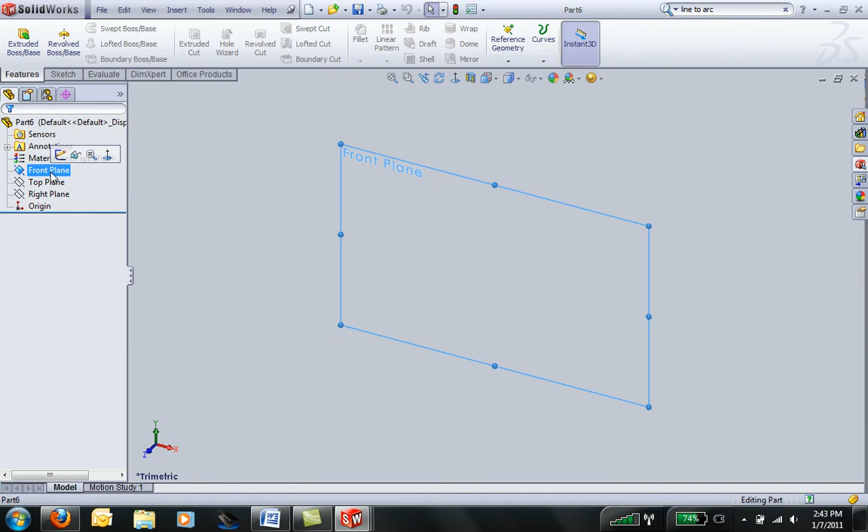There's really two options here. This face has a lot of information on it, right? You can see that the part is jogged, as does this face where you can see the two holes and the slot in the part.

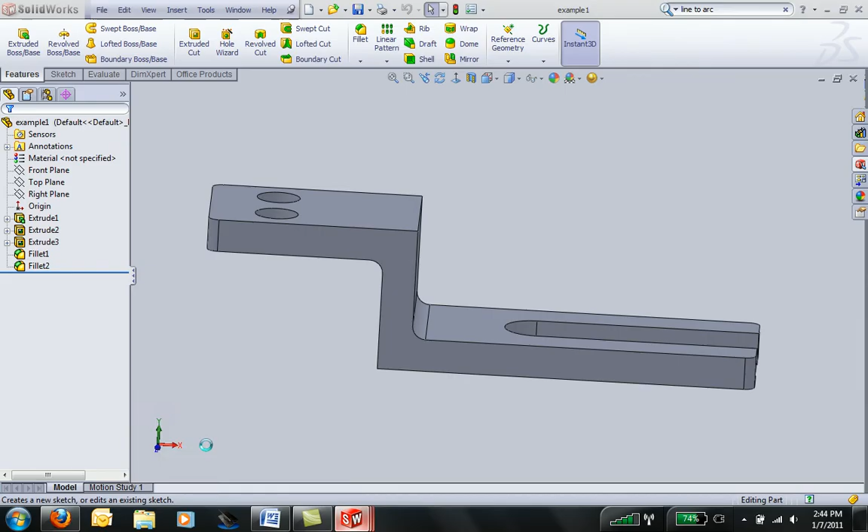I'm going to go ahead and choose to draw this side first, and then I'll add the holes and slot later. So if I go look at the drawing, I can get my dimensions from there. Looks like the whole part overall is 264.2, and the jog is at 180, and the part is 15.8 millimeters thick.

So if I come back to Solidworks, I can go ahead and start my new part. I've got a sketch open, so I'll just grab the line tool. And I remember you want to start on the origin always, and as I come across, notice that there is an angle and numeric value right next to my pointer.

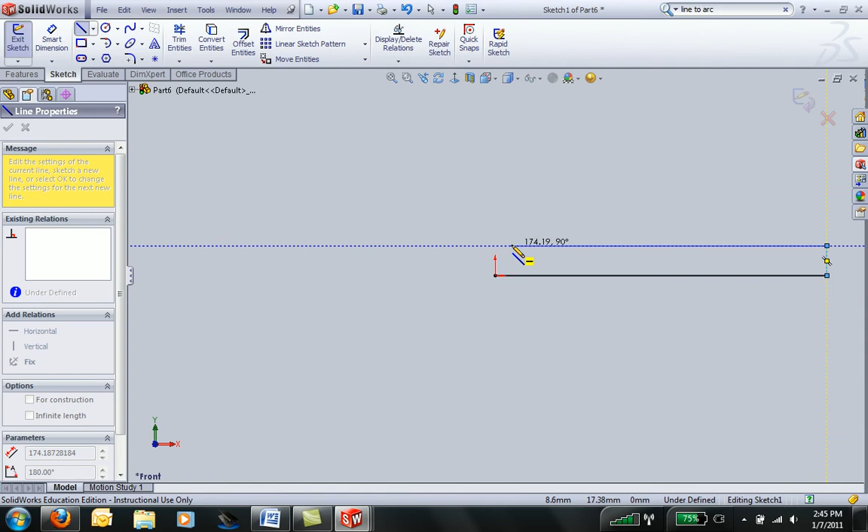So I'm going to come out to about 180, doesn't need to be exact, right? So we can come up to 182, go up till it's about 15, come back across and up about 50, and then out, let's see, I'd need to go 80 more, approximately down 15 or so, back across.

And notice the guides that pop up. So when I come to be vertical from the origin, there's a little dashed line that appears. And so I'll click right on that dashed line to make sure that my lines end up in the right spot. Okay, now I can go ahead and add some dimensions.

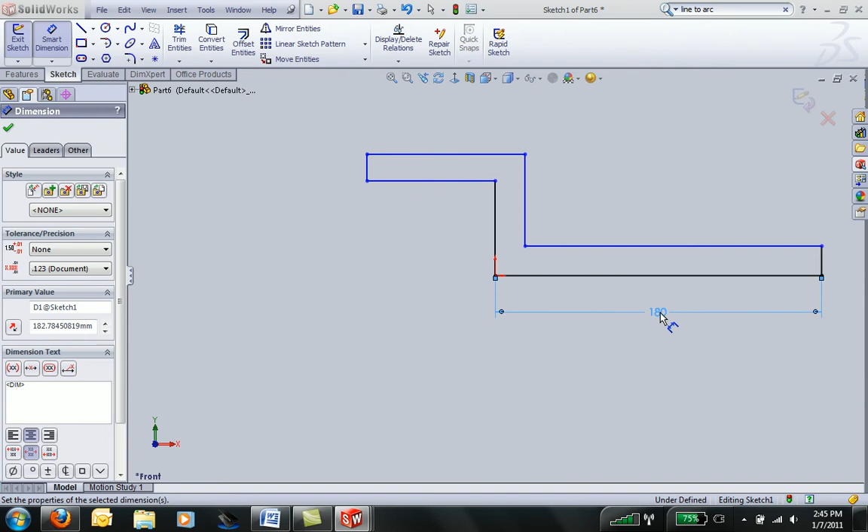I know that this dimension here was 180 millimeters, and that the overall dimension was 264.2. Okay, and I know that the part is 15.8 millimeters thick, so I can add a couple more dimensions here.

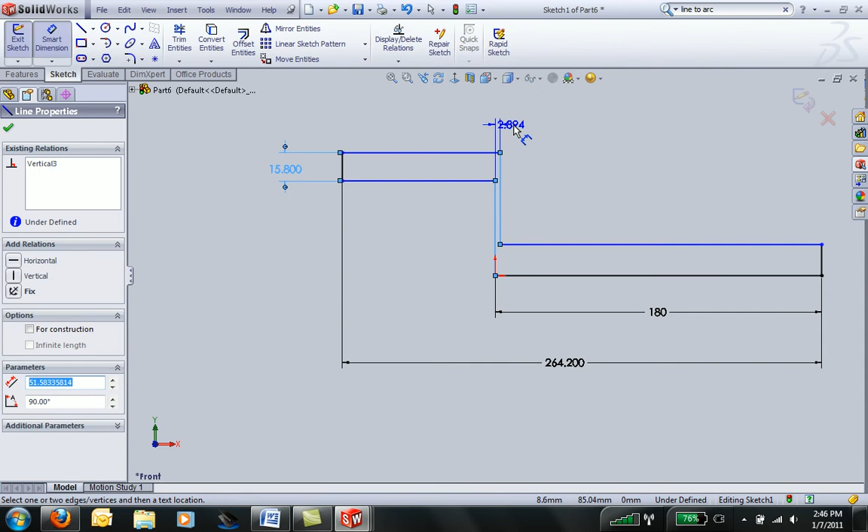All right, so the part's looking pretty good, but you can still see you have some undefined edges here, and if you can't tell what's undefined about them, you can always grab them and try and move them, and you can figure out that you need to add a dimension for height here.

So let's flip back over to the drawing and see how tall the part is. It looks like the part is 70 millimeters tall, so I'll go ahead and add that in. Add smart dimension, click on this edge, and come out to 70 millimeters.

And you want to be careful where you place your dimensions, because in the future we're going to be able to import those dimensions automatically to a drawing. And so make sure you place your dimensions someplace where they make sense.

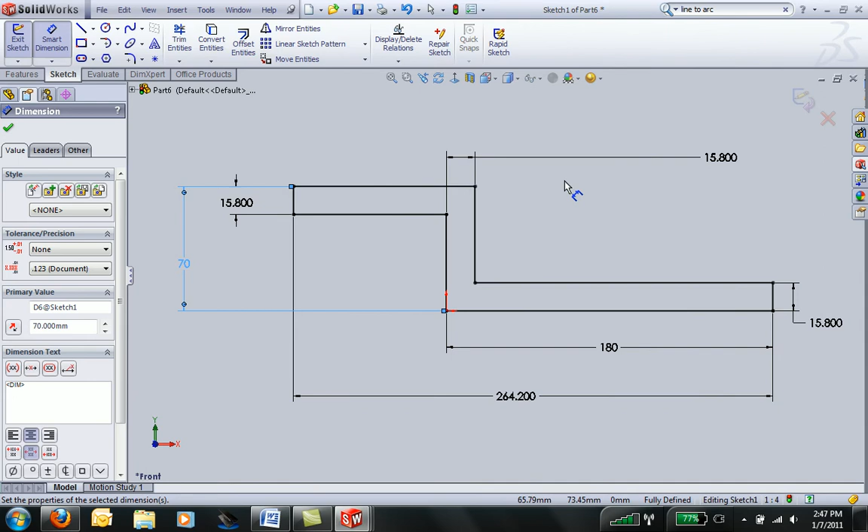All right, when I'm done with the sketch, I can click on Exit Sketch, come over to Features, and extrude the feature. And I can't remember how wide it is, so I'll go back and check the drawing. Looks like it is 70 millimeters wide.

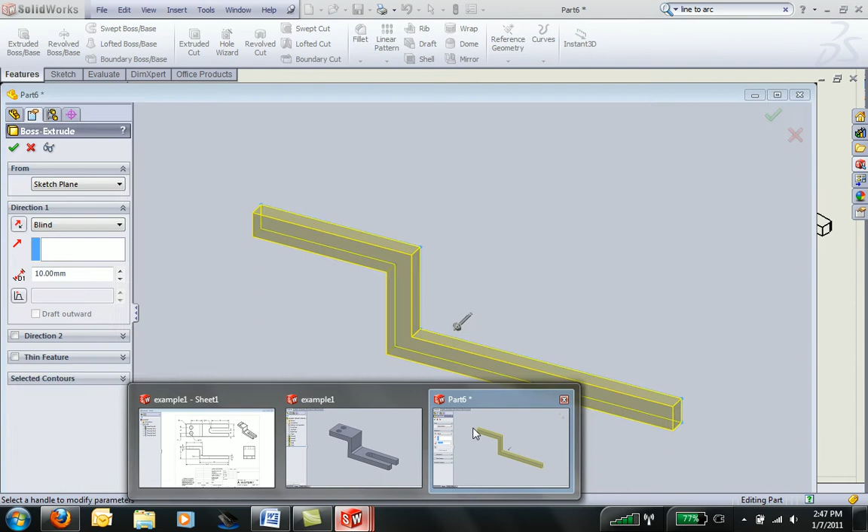All right, so the other thing I'm going to look at while I'm here is that the two holes are located 68 millimeters from the jog, and they have a diameter of 20.6 millimeters and are separated by 32 millimeters. All right, so I'll head back over to finish this extrusion up. Looks like it was 70 millimeters wide.

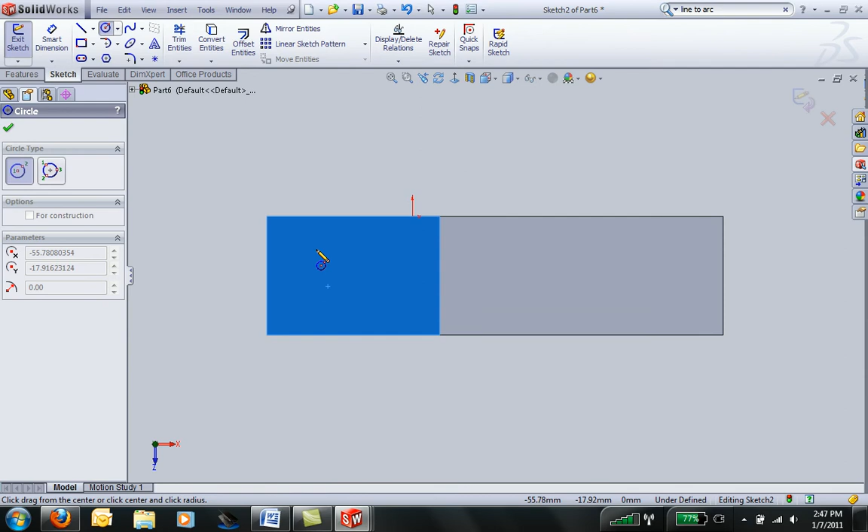Okay, now I need to open a new sketch on this plane to add my holes, so I can highlight the face and then click on Sketch on the flyout menu. I like to use the perpendicular tool, so I can see what I'm drawing here. And I'll grab my circle tool, draw one circle. It's about the right size, and then I can come down and I get a little pop-up to help me to get the two circles vertical.

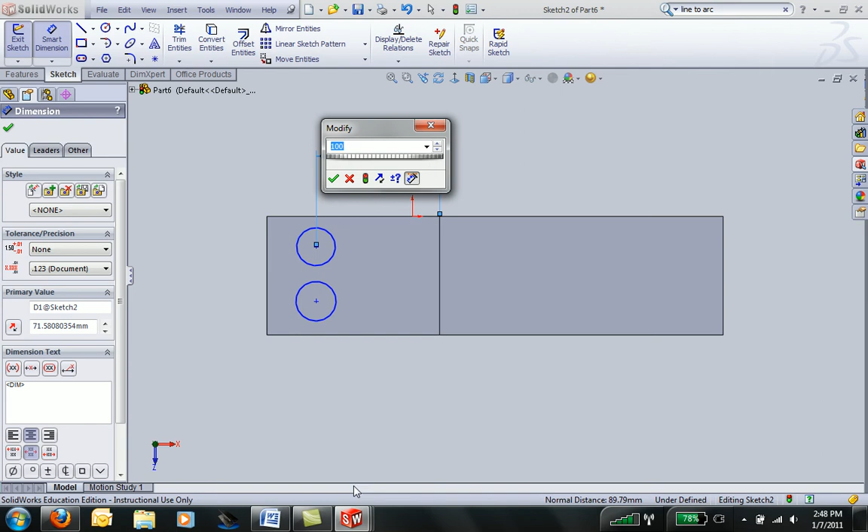I can add some dimensions here, so from the center of the circle to the edge was, well, wasn't 100. I can't remember what it was. So let me flop back to the drawing and I'll take a look. Well, it looks like it wants me to put that in there. It obviously wasn't 100. Looks like it is 68, 32, and 20.6. So I can come back.

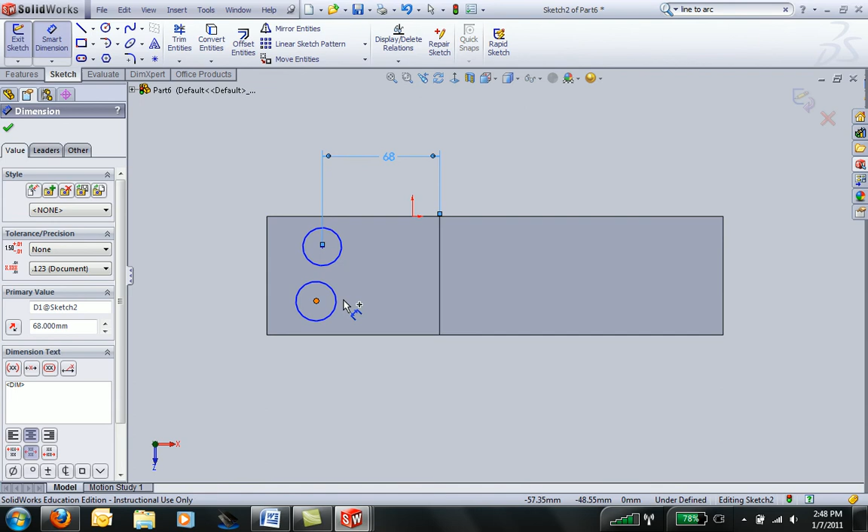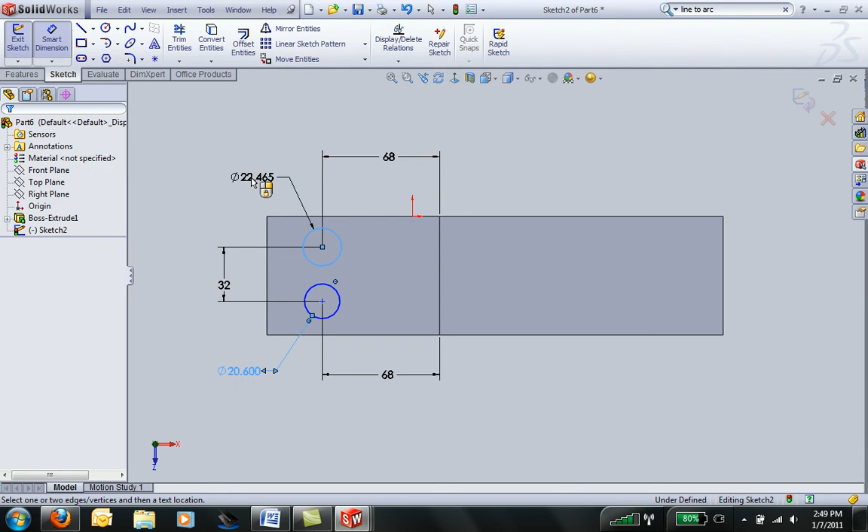If I want to modify a dimension after I've put it in, I can double click on it and say 68. I'll add that dimension for this circle as well. I'll add the separation between them, 32. And I'll add the dimension 20.6 and 20.6.

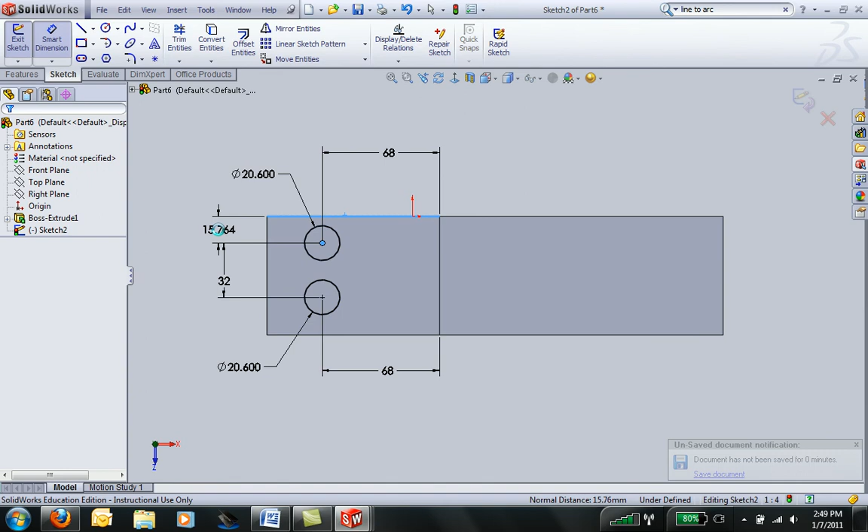And they're still under defined, which if I want to see how they're undefined, I can grab them and see that they can move up and down. And so I need to add that dimension. And it looks like they're 19 millimeters off the edge. So I can go ahead and add that. Okay, and we're fully defined, so I can go ahead and cut those holes right on through the part.

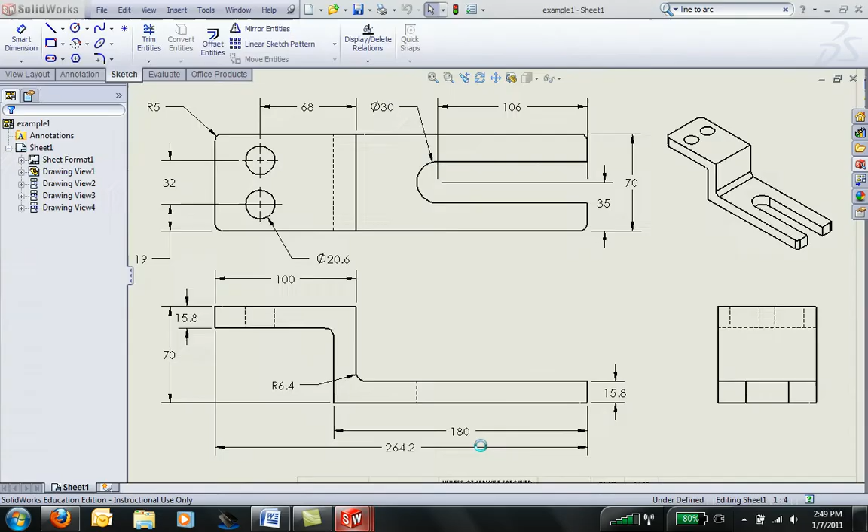Okay, now I need to add my slot, so let's go take a look at the dimensions for the slot. It looks like the slot is 35 millimeters at the beginning and 30 millimeters wide. So it's centered and 30 millimeters wide by 106 long. So I can open a new sketch on here. Again, remember I like my perpendicular tool. And I'm going to go ahead and start this by using my rectangle tool. And then I'm going to need to put a circle on the end of it.

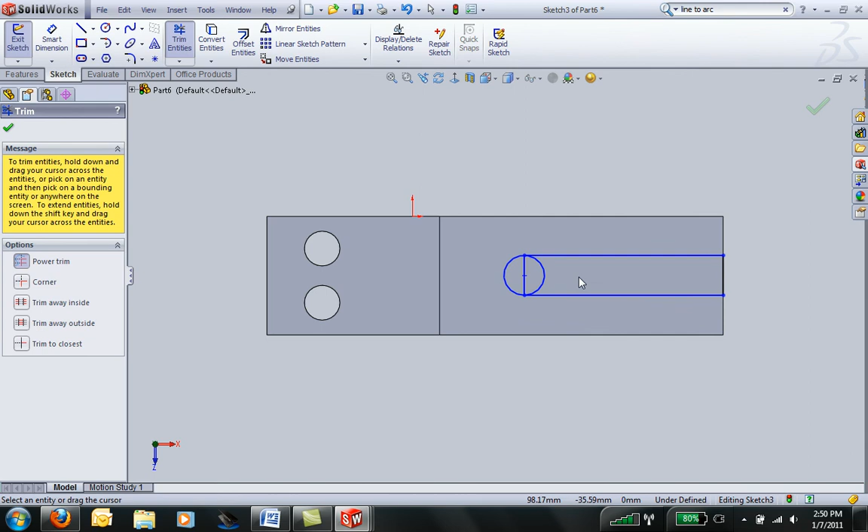And if I mouse over the end of that rectangle, I can grab the midpoint and then put a circle on it. But this has left me with multiple contours, so I need to use the trim command to remove those center things. So I click and hold to drag across, and that will delete the different parts that I don't want. And now I can dimension this guy.

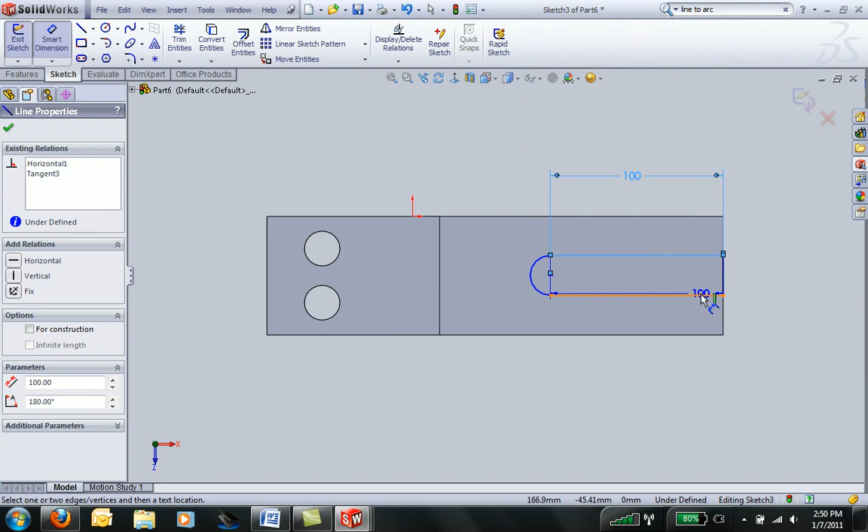It was 30 wide. And it was 35, it was centered, so I can go ahead and put this dimension of 35 on here, which will cause it to be centered. But now I have a problem. This is no longer going to be a complete circle. So what I can do is I can click on that point and drag it. And better yet, I can go ahead and click on a smart dimension to add 100.

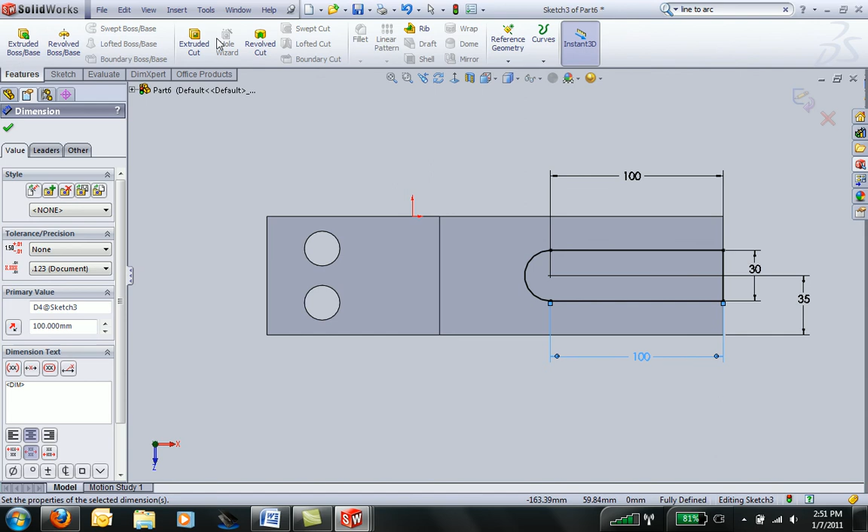Okay, and features, extrude cut. And look at that, we now have our forked part. The last thing we need to do is add a couple fillets. The fillets had a radius of 5 millimeters on them. And this part was filleted here.

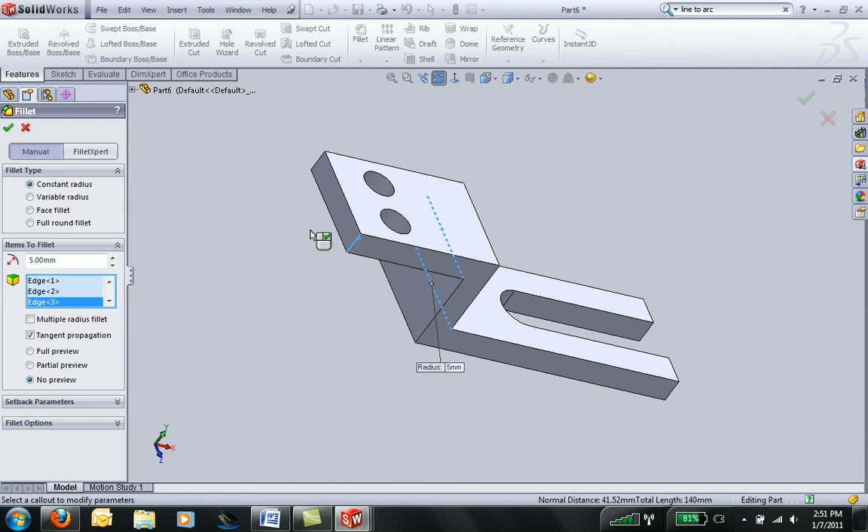And I can roll around and grab here. It was also filleted up here on these two spots. And down at the very bottom at these two spots. Okay. If I like all my selections, I click check. And it adds in those rounds for me.

Okay. Tune in next time and we'll talk about how we could have done dimensioning a little bit more efficiently by using sketch relations.